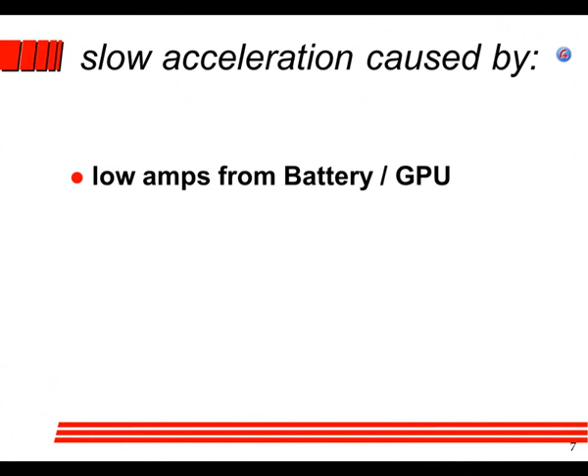All right, last time we left off, we were on that slide of problems with starts. We had covered a no start, and of course slow acceleration. That would be a great test question: what would be the possible outcomes during an engine start if the engine accelerated slower than normal?

One outcome is it could turn into a hot start, and the other outcome is that it could turn into a hung start. So there's another good question: what do you do in case of a hot start?

Number one, fuel, what goes off? What kind of fuel? The nozzles get turned off, and then, motor the engine if possible, and we're going to get to why it's 'if'.

Definition of a hot start, we covered that. Definition of a hung start, we covered that. You can expect one or both of those on the test. And then what do you do in case of a hung start?

It's exactly the same as... so if I say, what do you do in case of a hung start, don't write down the same thing as a hot start. I'll be very specific. I'll say, what are the two steps you must take as the operator of a turbine engine if you have a hung start.

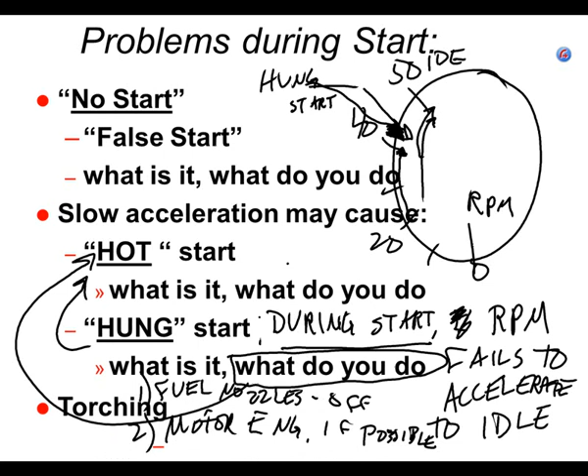So hopefully, and torching. So we didn't get to torching.

It won't let me erase it. Oh, I saved it. Okay, all right.

Well, torching is when flames come out of the back of the engine when it's running, including during start. So torching is generally caused by something going on inside of the combustion chamber that's not normal.

Maybe it took an extra second or two or three for the ignition to catch the fuel on fire. So maybe some of the fuel caught on fire, but it came out and went through the turbine section as a liquid with the liquid on fire and actually came out. The fuel was still burning.

So torching is when you see flames coming out of the exhaust pipe. And it could occur during start. Now, if it's a little bit and it doesn't happen during the next engine start, you really don't have to worry anything about it.

If you're seeing torching all the time, every time that engine starts, now you need to do something about it. And so you as a jet engine mechanic are going to get to try to figure that out. Is the ignition coming on when it's supposed to? Is the fuel control squirting in more fuel into the engine than it was designed for during start?

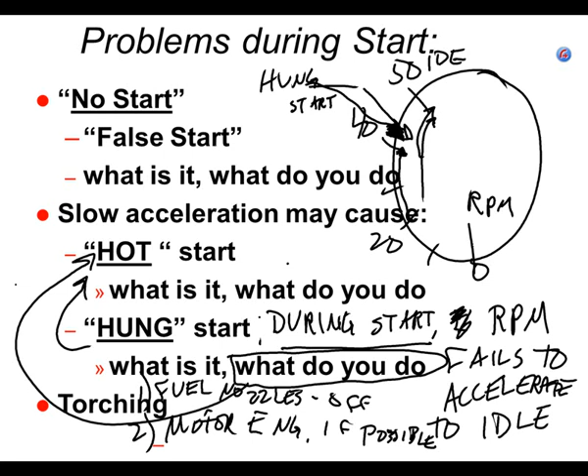So that would be going, okay, maybe I need to be looking at the fuel flow gauge during the engine start. Or I was looking at the fuel flow gauge, and instead of 500 pounds a minute, it was 700 pounds a minute. Now I'm going to have a pretty good clue that it's the fuel control. It is putting more fuel into the engine than it's designed for.

All right, the two major types of starter motors that you're going to find on 99.9% of engines out there, if you're not working on military jets, is either going to be a starter generator or a pneumatic starter. Starter generators, they're all going to be 24/28 volt systems.

And a starter generator is what's on the PT6 out in the lab, the one on the stand with the propeller on it. During start, you give it electricity, and it converts electrical power into rotational power, and it spins the engine. After you get the engine started, you flip a switch or two, it turns it into a generator, and now it takes energy off of the engine and converts it into electrical power. So it does both of these two things. It's a starter and it's a generator, hence the term starter generators.

You like how I fit the word hence in there? No? Brian's saying no.

In any case, I've never seen a starter generator on a turbine engine that was a 12-volt/14 volt system. Never. I've only seen them on 24/28 volt systems. And if the engine is small enough to have a starter generator, then pretty much it means that there's a battery on board the aircraft that will power the starter generator during start.

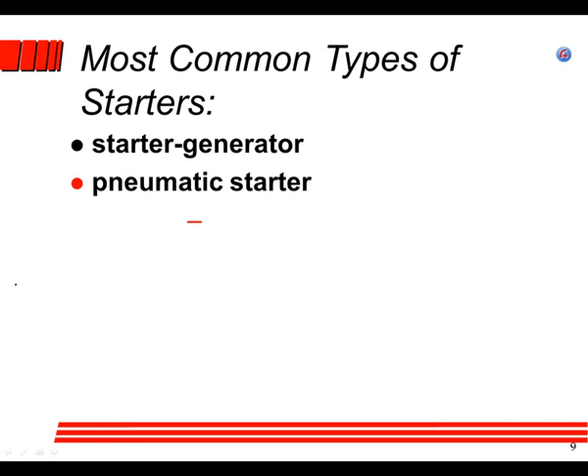So we're going to take a look at starter generators. Effectively, you're going to see generators put on aircraft where the primary power is 28 volts DC, direct current. That means the electrons only go one way through the majority of the components. So if it's a 28 volt DC system, and that's what all of the electrical components on the aircraft operate on, and it's a turbine engine, you're going to have a starter generator. The battery is going to be big enough to start the engine. So generally it's smaller engines, and of course I already said it's a DC starter motor during start.

There are 2 places you can get electrical power to run this DC starter generator. You can get it off of the battery on board the aircraft, or off of a ground power unit. We're actually using a ground power unit out at the engine run-up stand to provide a very high amperage, 28 volts DC. So you could use that same power unit to plug into an aircraft and start an aircraft engine if it had a starter generator.

After you start it up, you flip a switch or two, and it stops being a starter motor and starts being a generator. That saves you a little bit of weight, since you don't have to have one starter and one generator. This one thing is about 10% heavier than a starter or 10% heavier than a generator, but it does the work of 200%.

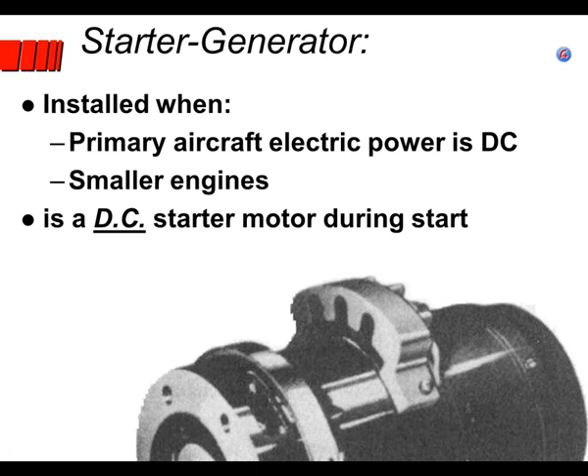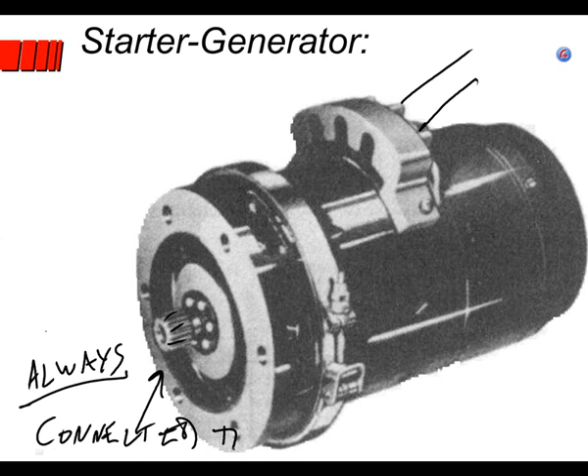Now, here's what's really important about starter generators: they are always connected to the engine. For instance, this shaft sticking out - electrical cables come in here, and this shaft with the splines on it is always connected to the accessory gearbox.

This is very important because a slide or two ago we talked about having a hot start or a hung start. If that occurs after you've let go of the starter switch, and if this was like a car or a reciprocating engine starter, letting go of the switch retracts the starter gears away from the engine. Once the engine is spinning, if you push the button back down - in a car you may have done this once or twice and heard the gears grinding - the splines or gear teeth inside the gearbox of a turbine engine may break off and go into the engine.

It's time to take the engine apart. The magnetic chip light will come on, you'll rehearse many words, and you'll be trying to figure out how you're going to explain what you did to the boss.

The nice thing with electrical starter generators is that the shaft with the teeth doesn't retract, doesn't go in and out - it's always engaged, always connected. So unlike a piston-powered airplane engine or your piston-powered car, if you let go of the starter switch on an electric starter motor, the starter motor is gone, but the shaft is still engaged.

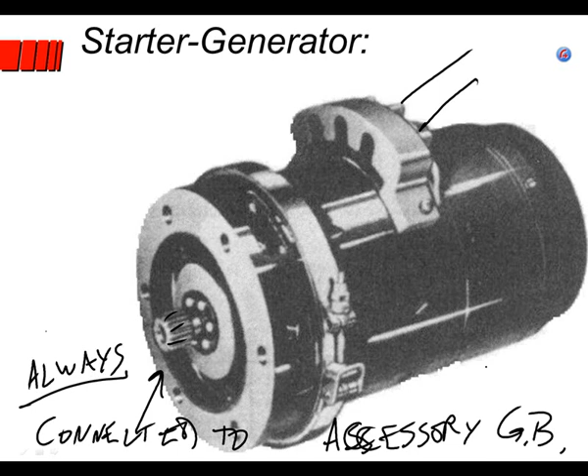Yay. Okay, I think that's yay.

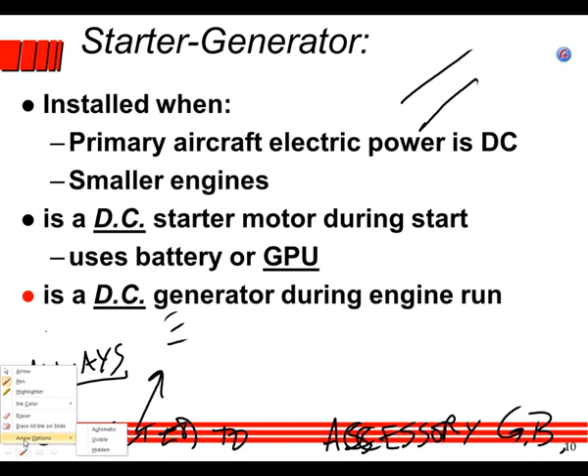The test question would be something like, everyone except White gets this correct. To answer your question: you have a start on a turbine engine that's started by a DC starter generator. If you let go of the starter switch and you have a hung start, is it acceptable to push the starter switch back down even though you had already let go of it?

When it says master switch, that's like the masters of the universe. I want everything under my control, and I want people to... I think it is not wired the way I want. That is correct. So there's the question.

Well, there's a different way to ask that question. Are DC starter generators always connected to the engine accessory gearbox? All right, is it? Yes, okay. Why is that a wonderful thing? Here's another way to ask the same question: it makes it so that once the engine spins up, you can turn the starter into a generator. Why else would it be wonderful that the starter generator is in the gearbox?

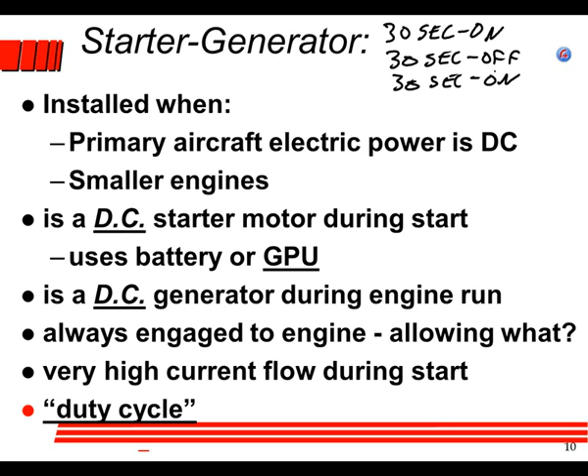So I'm going to give you a very typical, generic set of numbers—every starter generator duty cycle is a little different, but it might look something like this. It might be 30 seconds can be on, and then you have to wait 30 seconds off, then 30 seconds on, 30 seconds off, and then 30 minutes off. So it's going to say you can operate that starter motor 2 or 3 times, and then you're going to have to wait 10 minutes, 20 minutes, 30 minutes. So every electrical starter generator is going to have a little different duty cycle. The duty cycle is how long can you operate the starter motor, and then how long do you have to wait before you can do it again.

And so if you're going to go start a turbine engine and it's got a starter generator on it, you need to look that up. So when you take that aircraft outside and you're going to run the engine, you know what the starter duty cycle is, and you don't melt the starter motor, because then someone will ask you some interesting questions. When I say interesting, I'm being sarcastic. Any questions about duty cycle?

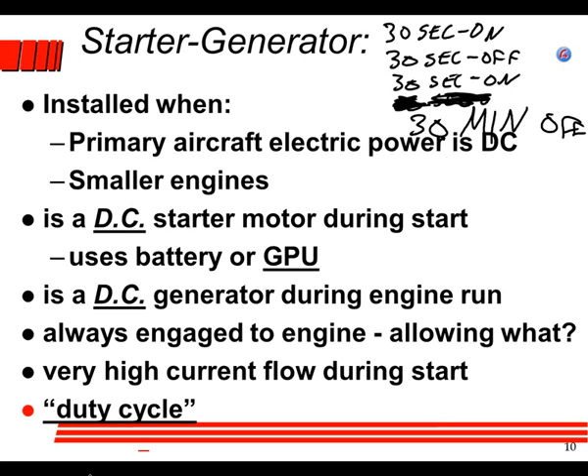All right, let's keep going. I have many, many more things to tell you.

All right, so we just covered starter generators. Now we're going to talk a bit more about pneumatic starters. I'm not going to ask you, if I asked you about what starters are on what kind of aircraft, you would say starter generators are found on small turbine engines, and on aircraft where the primary electrical system is 28 volts.

You don't have to write this part down, but what aircraft have primarily 28 volt DC? Small turboprops like a PT6, small turbine-powered helicopters, that out in the warehouse. These have a generator on it - PT6 DC starter generator. They're installed on aircraft because the engine's small enough that the starter generator and the battery weigh less, and the aircraft power system is primarily 28 volts DC.

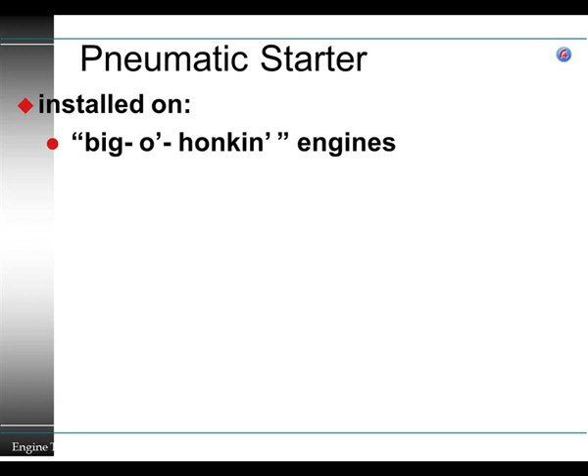On the other hand, pneumatic starters use high volume, high pressure air. They're going to be found on very large engines - you don't have to spell the word 'big old honkin' on the test, if you'd rather write 'large,' that's fine. You don't have to write down the following list, I'm not going to ask you this answer. This is the way I would ask the question: where would you find pneumatic starters? You would find pneumatic starters on large turbine engines, and on aircraft that have alternating current, AC, as their primary electrical power. So that's where you would find pneumatic starters.

The vast majority of turbofans are big enough that the weight of an APU and a pneumatic starter is less than the weight of electric starter motors and batteries. But I have seen small turbofans on some small biz jets that used electric starter motors, and they didn't have an APU on board. So you can't just say turbofans, it's big turbofans. If the primary power system on transport category jets - I'm not going to ask you these four - when I say transport category, we're talking airliners, big biz jets, big turbine helicopters, big turboprops. All those aircraft use 400 volts AC, alternating current, as the primary power system on the aircraft.

Then it's going to have an APU that provides pneumatic power going through stainless steel ducting out to the engines to pneumatic engine starters. Because the weight of the APU and the weight of all the pneumatic starters and the weight of those stainless steel ducts are less than the weight of having enough batteries and very, very heavy electric starter motors. Let's just say for fun, I'm going to make up some numbers.

Let's say it's a Boeing 777. Those engines put out about 100,000 pounds of thrust. I'm going to make up a number and say that the pneumatic starter on it weighs 100 pounds. What if the electric starter that you had to put onto it weighed 500 pounds each engine? So if we put pneumatic starters on it, we say 400 pounds saved on each - that's 800 pounds. Well, what if our APU only weighs 200 pounds? And we're running most of that pneumatic ducting around the airplane anyway. We're still saving several hundred pounds.

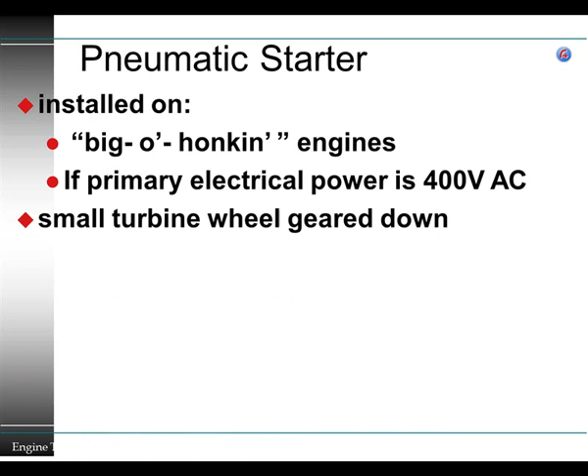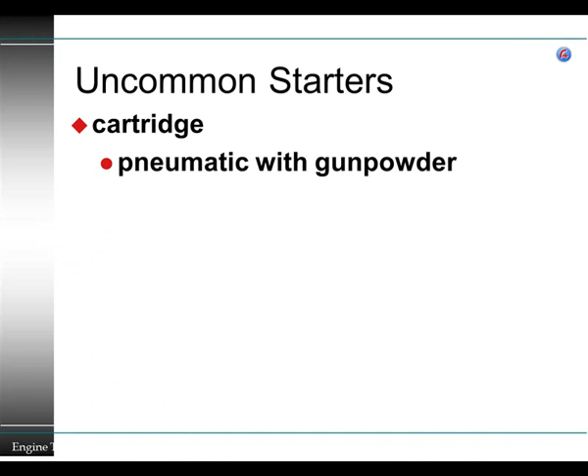All right, a pneumatic starter - I'll show you a picture of it here. I'm pretty sure I have a picture. Show me a picture, I want to see a picture. Now I feel bad - maybe not that bad. Where did it go? Maybe it's on the next slide. No. I guess I'm going to have to draw a picture. Yeah, I get to draw pictures. Okay, maybe you don't like it, but I like drawing pictures.

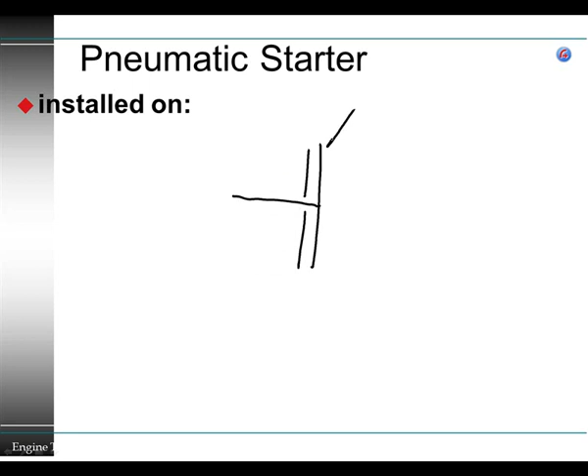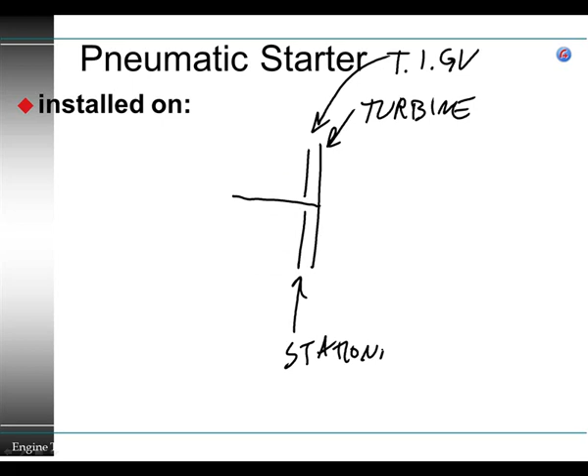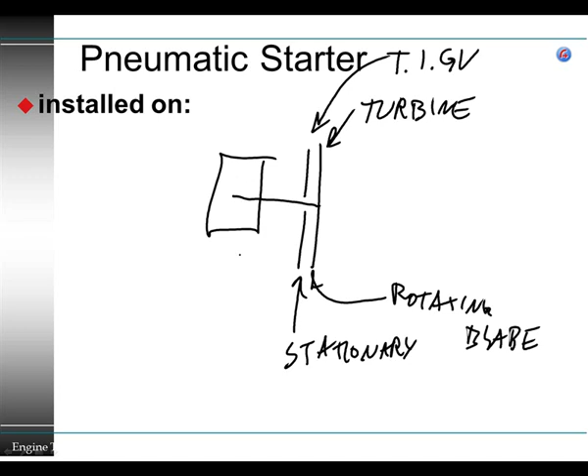So a pneumatic starter is literally just a turbine wheel. So we have a turbine, and you're going to have turbine inlet guide vanes - essentially these are the stationary blades. And then you've got one set of rotating blades. This is just like a single stage of a turbine engine, except that there's no combustion chamber. We're going to take this output shaft and run it into a gear reduction box.

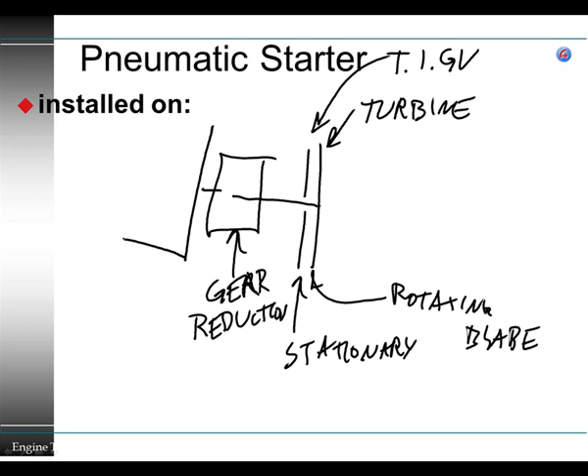And then that is going to go into the accessory section of a big old honking engine that I can't even draw how big it is.

So literally, you're going to take pneumatic air, or high volume, high pressure air. It's going to be hot, but we don't really care if it's hot. And you're going to run the air through this turbine wheel. Then the power extracted by this turbine is going to spin all the gears around in this gear reduction.

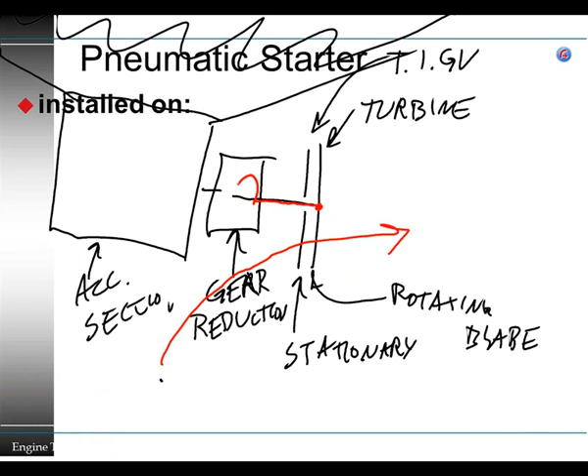But this thing right here may be spinning 20,000 or 40,000 RPMs. You don't have to write that down, but it's going to be a really high RPM. And at first, this gearbox going in here, we need it a lot less than 20 or 40,000. So there's going to be a reduction in RPM.

And that's going to run the accessory section of the engine, and it's going to have gears in it, and then it's going to supply its power to the shaft inside of the engine.

So a turbine wheel and the stationary blades and this gearbox don't have to weigh that much. This turbine section here, this one stage of turbine energy extraction doesn't have to weigh that much. The gearbox weighs more than this turbine does.

And remember, the point of a turbine is really just to extract energy from high velocity gases going past it. Of course, you need high velocity and high volume. So did I lose anybody about how a pneumatic starter works?

I do have some more pictures, I know, somewhere. Question?

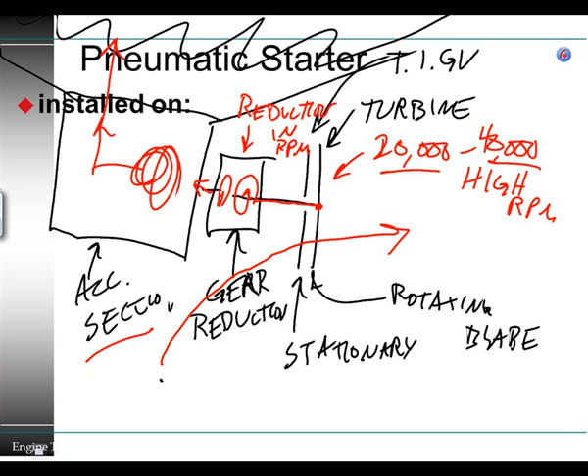Okay, so there it is. The aircraft is going to be a very large engine, and the primary power system is going to be 400 volts alternating current. Just explain the fact that it's really just a small turbine wheel that extracts energy, and it gears it down, and that goes into the accessory section.

And you can get this high velocity, high volume air from 3 places. That'd be a great test question. Where can you get pneumatic power to run a pneumatic starter?

Well, you can run it off of the APU on the aircraft. You start that up with a battery. Now the APU is running in the tail, and it fills the pneumatic system full of air. So now you can start all your engines off the APU if you want to. And that's a very, very, very common way to do it.

Or you could have a ground power unit. You could have a ground unit, really just an APU on wheels, and it's a hose, like a 3 or 4 foot diameter hose, and you hook it into the pneumatic system of the airplane, and then the pneumatic system has high volume, high pressure air, and that can spin it.

After you get one engine started, can you take bleed air off the compressor off of that main engine, or the pneumatic system on the airplane? Well, of course you can, because you're going to do that all day long when the engine's running on normal operations.

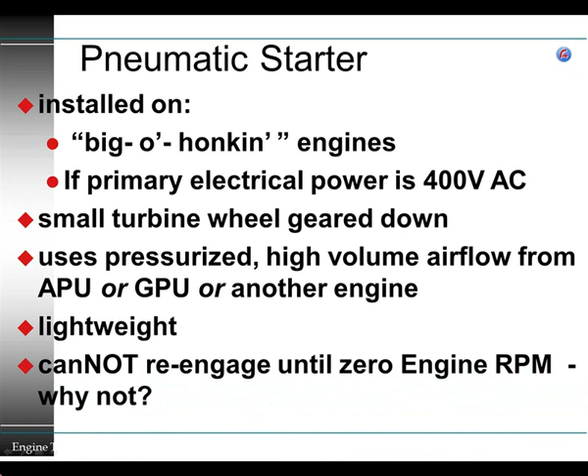Wow, I wish I hadn't erased all that stuff. You know what? I'm going to go to another picture because I know I got a picture in here somewhere.

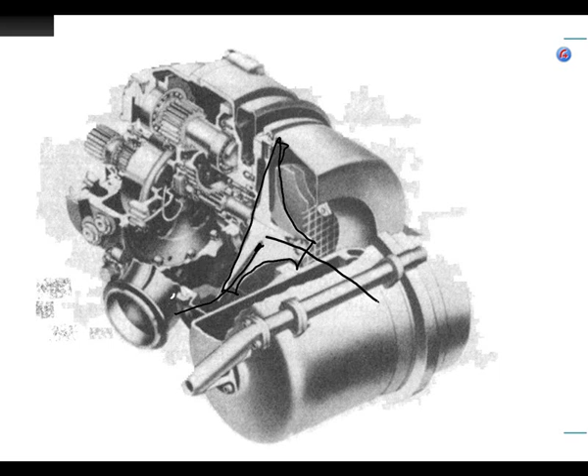Let's use this one. So here is one type of pneumatic starter, we're going to look at it here shortly. You'll notice in this case, although the picture I drew... no, it's not the one I was looking for. But this right here is a radial inflow turbine. So if air goes in here and comes out here, this is a turbine wheel.

So can you have an axial flow turbine? Can you have a radial inflow turbine? Is that what Mr. Asman called them, radial inflow turbines? Not the compressor. A centrifugal turbine? Okay, that works great.

The shaft of this goes into gear reduction, and then it goes out here. The problem is that while you're starting the engine, those gear teeth, that spline, get inserted in the gearbox. Then after you let go of the starter motor at 40% RPM, it's spring loaded, it retracts back into the starter motor, because you don't want this pneumatic starter spinning when the engine is at 100% power. This thing hits red line at around that 40%. When the engine's at around 40, this thing is coming up on red line. So if you left it engaged, this would spin more than twice as fast as it was designed for, and it would come flying apart. So you have to disengage. Literally, that shaft with the gears has to disengage and get pulled out, get retracted out of that gearbox.

So let's try that same example. You're starting an engine, start spooling it at 20%. The ignition comes on, then the fuel nozzles come on. You're monitoring the EGT, it comes up there. You might be checking the oil pressure. At 40%, you let go of the starter switch. It accelerates from 40 and goes to about 42, and it hangs up. Continue.

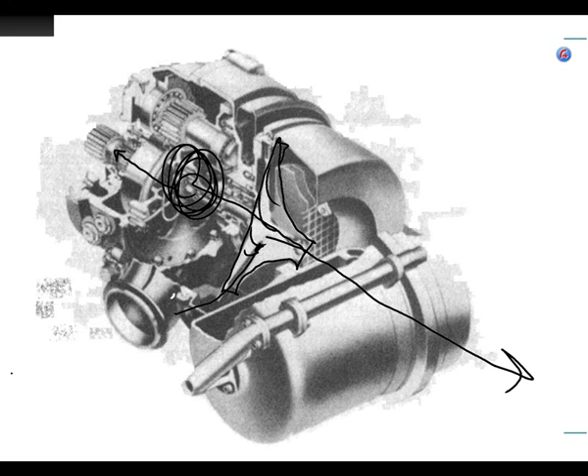All right, so then the last question on here, which was on the previous test. Pneumatic starters generally, typically, don't have a duty cycle. Are we pumping a lot of electricity through a pneumatic starter? No. Is the air hot? Yeah, but we got a turbine section. You think the engineer designed this turbine section to allow 400 or 600 degree Fahrenheit air to go through it? Yeah, because that's what's going to go through it if it's coming off of another engine. So you can just run it.

That's why on those compressor washes on that 737, they motored it for 3 minutes. But on the other two engines, I think they were electric starters, because they only motored them for 20 or 30 seconds, William.

Oh, the last word's typically no duty cycle. The question is, why is it not like DC starter generators? So why can you push the button back down on a DC starter generator if you... and the engine is... why?

I'm talking about duty cycle here. Pneumatic starters don't have duty cycles. Why do they not need duty cycles? Because the pneumatic starter can handle the high temperature pneumatic air indefinitely, and it will not get too hot.

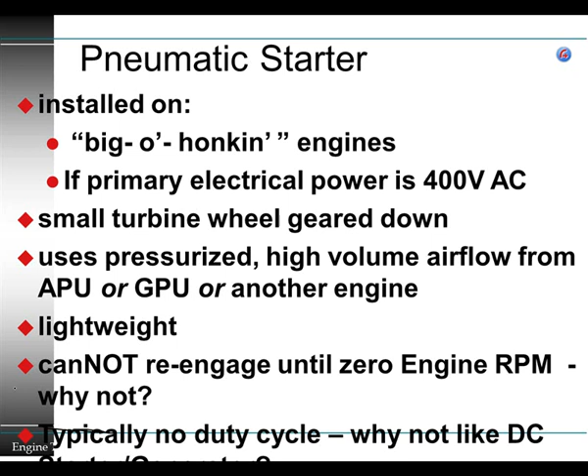So you don't have to take any notes on this slide. I'm not going to ask you any questions off of this slide.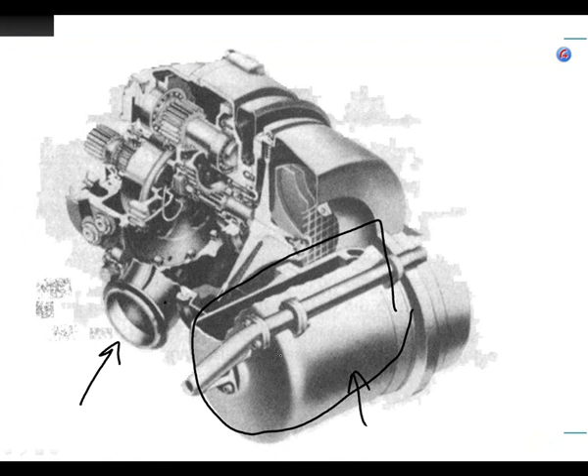There are cartridge starters. This is a cartridge starter, and instead of this starter right here, you can pump pneumatic air into it. You can also put a coffee can-sized container containing slow-burning gunpowder, and it will blow air into this pneumatic turbine. And you can mount this, and that gunpowder gets ignited from a switch in the cockpit electrically, igniting this gunpowder.

So that way you can run out to the airplane, jump in it, and you can actually start as many engines as you want. All you need is battery power. You turn on the battery switch, turn on the fuel valves, and run through your start, and when you get the starter motor on, you just flip the switch and it starts the gunpowder going. If you ever look at a video online, it looks like it's pouring out of the side of the engine because it's dirty gunpowder.

It's awesome. When I was on Nuclear Alert on B-52s, we had 8 engines. There was 2 engines in one pod, 2 engines in another, and on the other wing, 2 engines in a pod, 2 engines in another. Every other engine had a pneumatic starter with gunpowder on it, so we could run out there in case of nuclear war.

The pilots could jump in the top, turn on the electrical switch, and they would start engines simultaneously. About 30 seconds after they sat down, they'd have things running, and then they would use the bleed air off that to start the next one right next to it, because now 4 out of your 8 engines were producing pneumatic power. So now it's another minute after the pilot sat down.

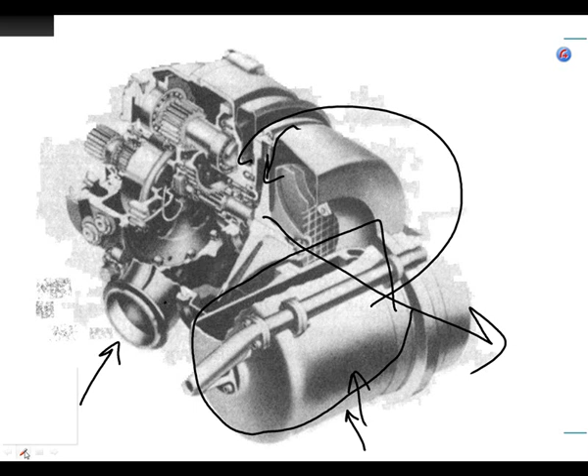In any case, the only place I've ever seen gunpowder cartridge starters are on military aircraft, where you wanted to be able to start the engine with just a little bit of battery power. If you use that cartridge, you have to replace it after that flight, but in case of nuclear war, you're probably not going to take another flight. This is probably your last flight.

Ask me how much lead shielding is in a B-52 bomber to protect the crew against gamma rays emitted by all the nuclear warheads that are going to go off during that war, within which the B-52 will fly through. Sorry, the airplane's not made of lead. There's absolutely no lead shielding protecting the crew. There is some lead shielding in the bombs.

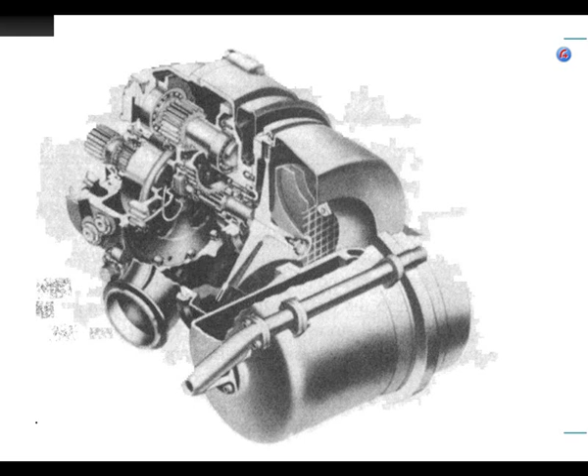So I think cartridge starters are fun. Gas turbine starters are actually a small turbine engine, like an F-16. There's a lot of other fighter jets that have this. They literally use

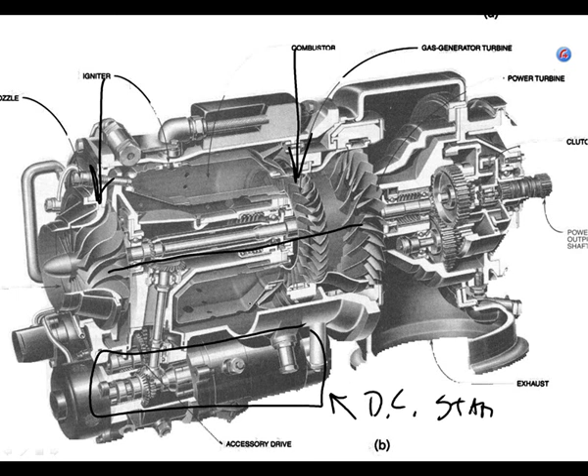typically a DC starter motor, and here's a shaft, and here's a compressor, and here is one set of turbines, and here is the combustion chamber. So this part right here is literally a turbojet. And then with no mechanical connection, there's an extra set of turbines out here, a power takeoff turbine if you will, and a gear reduction, and this shaft goes into the gearbox of the engine.

So all you need to get this thing started is a little bit of DC power off of a little battery. Literally, I got one right here. I mean, I don't have one, the school has one.

So here, I'll line it up the way it is, so you can see the intake. It's very small, that is a small intake. It's really a turbo shaft engine. And here, this is where the turbine is, this is the second set of turbines.

Usually the limit on these things is after 400 engine starts on this, it's time for an overhaul.

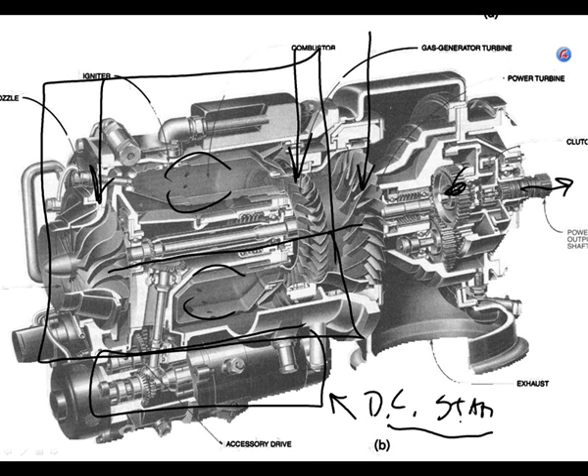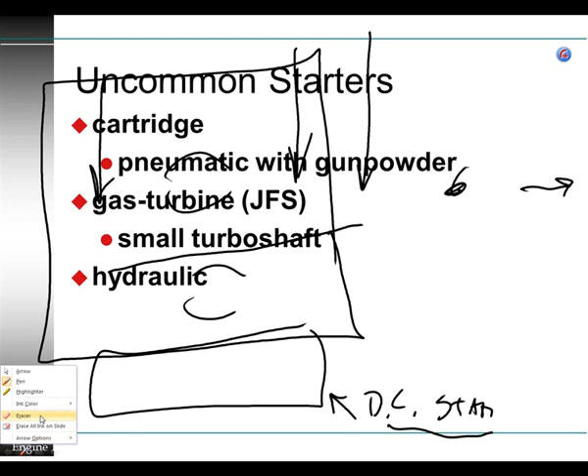Nuclear B-52s, they used to paint the bottom of them white to attempt to have less heat be absorbed by it during nuclear war. That was when B-52s were going to be flying at high altitude. But in later years, in the 70s and then 80s, B-52's mission was changed to fly most of its combat low level. So generally what you would do in a B-52 is take off and fly across the world at 30 to 40,000 feet.

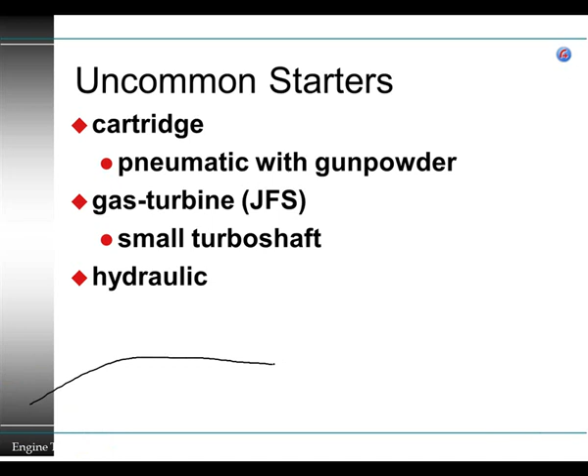And then, so here's the bad guys. And then when you're about 1,000 to 800 nautical miles away from targets, you would launch your cruise missiles, air-launched cruise missiles. The ones I flew, you could have 12 of these, but only one warhead each missile.

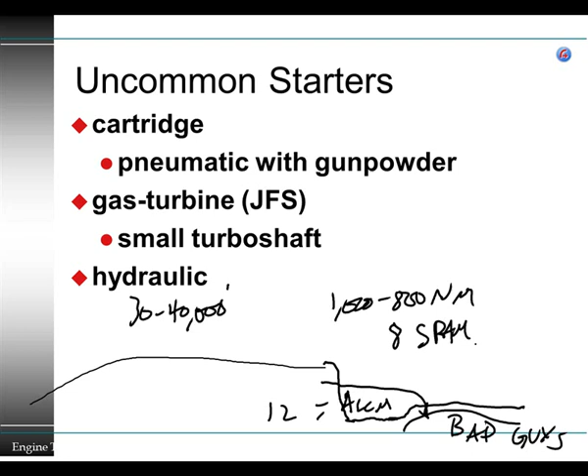And then you would descend to low altitude, and fly around where the bad guys were, and you would launch. You had 8 short-range attack missiles, and they were rocket-powered, and they would go Mach 3. It was a 2-stage solid rocket booster. It would go Mach 3, and unclassified distances, they'd go about 50 miles. You could fly past them and launch it, and the missile would turn around.

And then, of course, the fun part is, in a B-52's bomb bay, in the back was a rotary launcher with these 8 short-range attack missiles, like a revolver on a gun. But in the front, there were 4, you could put 4 gravity bombs in there, so you could also have 4 bombs. So let's see, 12 plus 8 plus 4 equals 24 warheads.

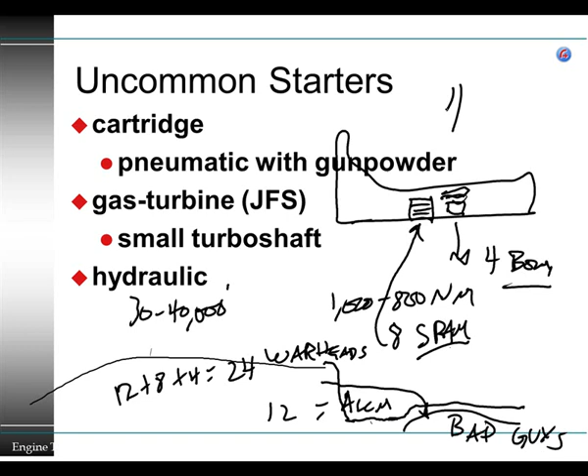The problem with flying around with these, the nice thing about the cruise missiles is they're going to blow up a long way away. Same thing for the short-range attack missiles. The bombs, on the other hand, let's just say for fun, I'm going to make up a number that's not classified. You're going to fly 400 feet above the ground, doing about 400 miles per hour, and the airplane is probably going to weigh about 400,000 pounds.

The problem is with this nuke, you're going to have to drop it out, and you don't want it to break when it hits, so you put a parachute on it. It falls down, and then it just sits there with the parachute hanging off it. People are going to walk up to it and say, 'Yo, what's up?'

And you're going to fly as fast as you can, maybe 500 miles an hour. How far do you have to wait? How long do you have the timer in this bomb set for, so that you can fly far enough away so when it goes off, you don't die too?

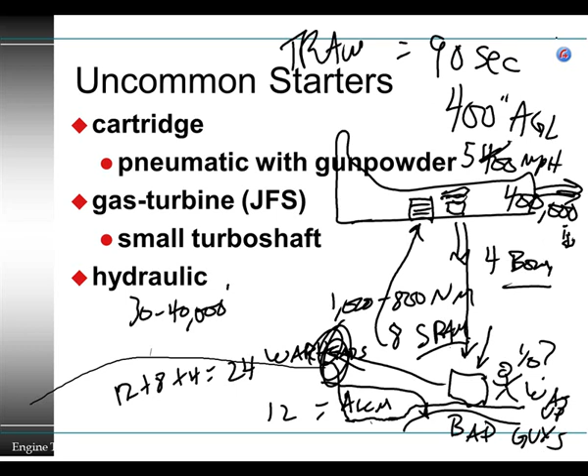This is an unclassified number for training purposes: 90 seconds. I hope you all have a great weekend.